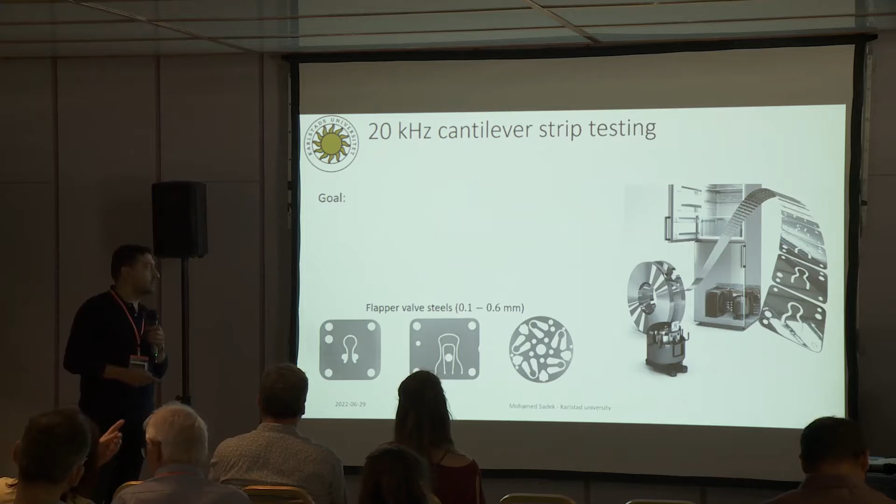The ones that we are testing in our lab have thicknesses in the range between 0.1 and 0.6 millimeters, although the presentation today will only include one thickness, the one that we started with. So the goal of this work is to develop a fatigue test method for thin, high-strength strip steels at 20 kHz for very high cycle fatigue in the gigacycle regime. And to do that, it's best to use the ultrasonic fatigue testing system. Then we can reach these lifetimes within reasonable times.

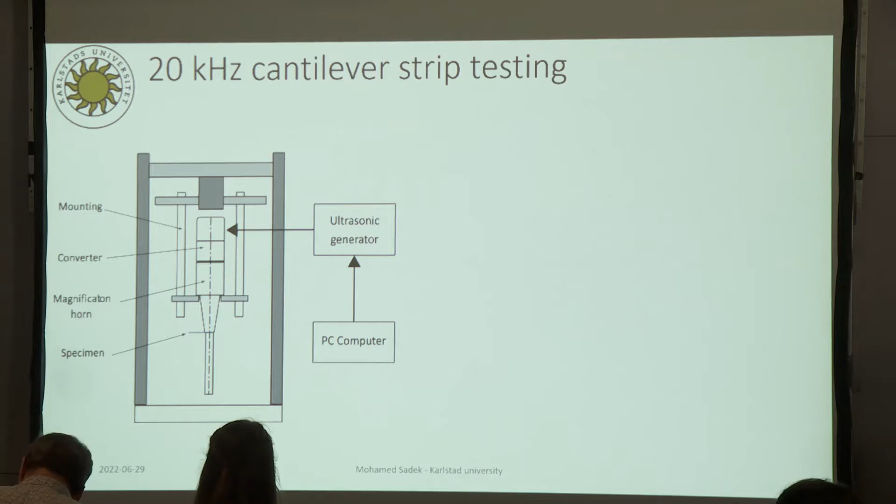So the idea was first seen on a brochure by Shimadzu, the company, where they showed a similar setup. They have the 20 kHz horn, and they clamped a strip steel specimen just below the horn right here. We took this idea further and developed it, and we designed our own specimen. We included a waist into the specimen, inspired by previous testing on strip steels at lower frequencies. The thickness of the material is 0.381 millimeters, and that is the thickness that will be included in this presentation.

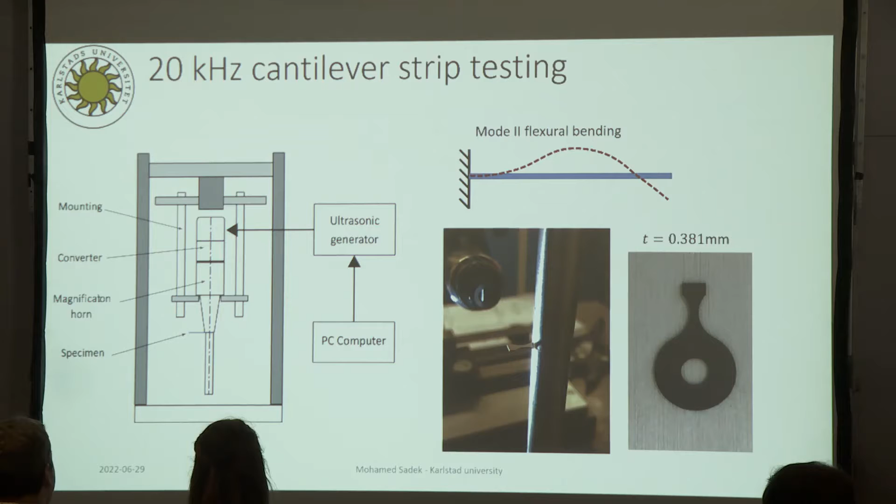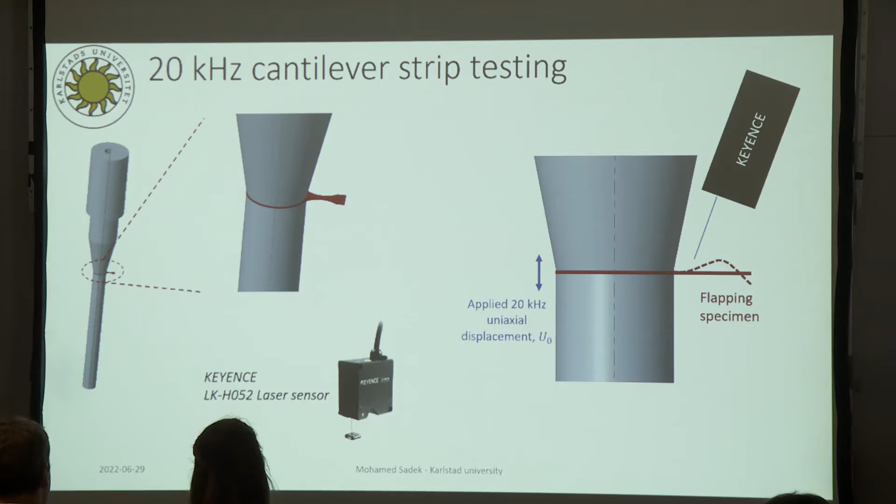We have the applied displacement in the horn right here, and that will be called U0 throughout this presentation, which is what we control during the experiment. We control the displacement right here. And then we will have a flapping specimen. We have also measured the displacement along this specimen with a laser sensor to try to confirm the calculations and the predictions.

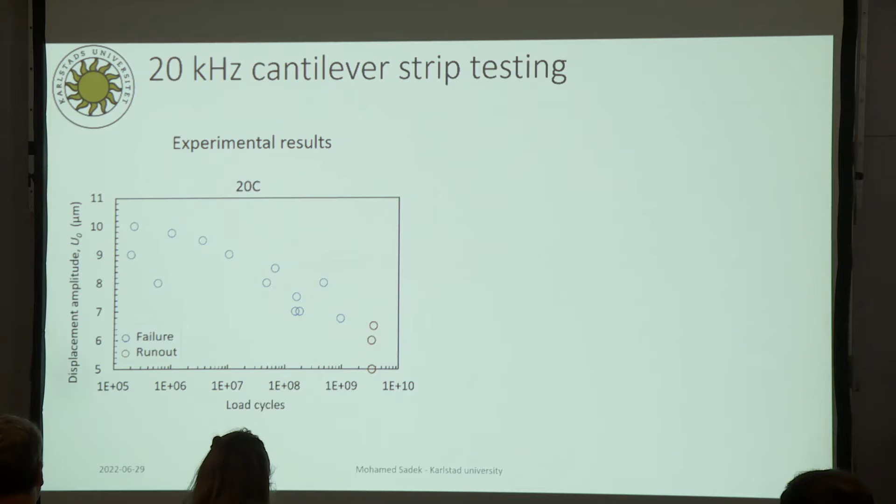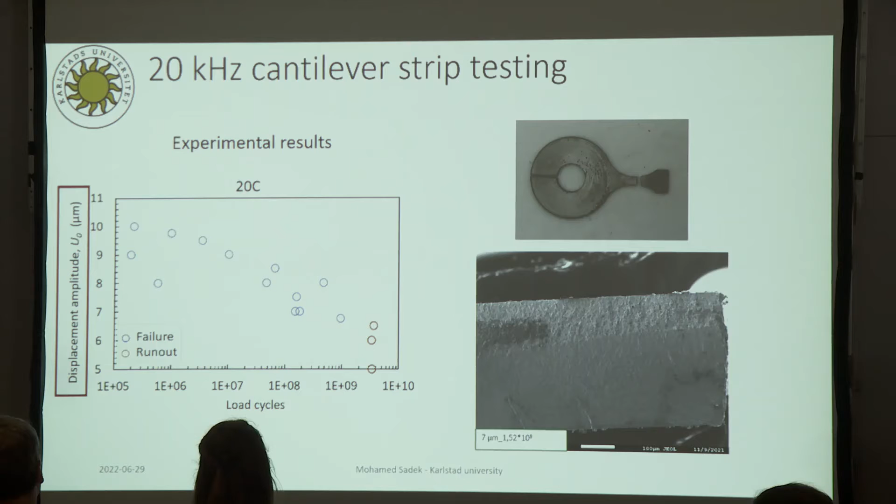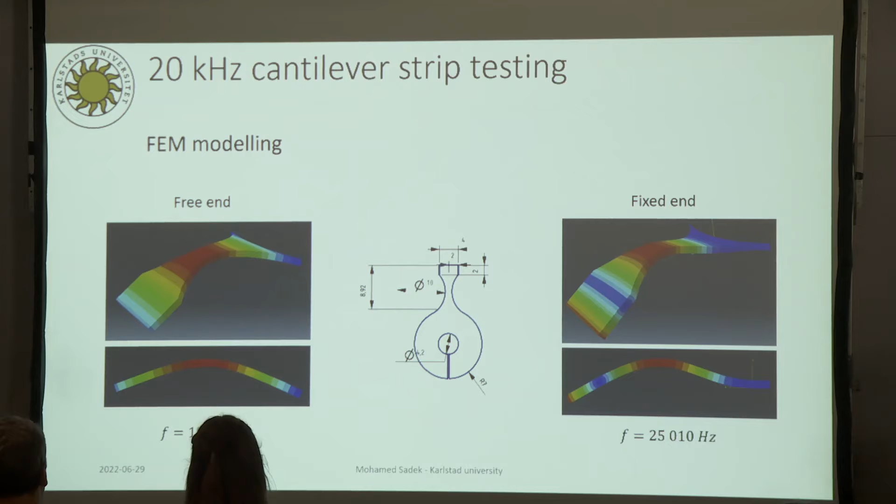For those of you used to the ultrasonic fatigue testing system, you should know that every part of the system has to have an individual resonance frequency at 20 kHz, but this specimen does not, and it works anyway. That is explained by the fact that the specimen has so little mass compared to the rest of the system that its frequency does not affect the frequency of the whole system. The specimen is so small that it's forced to follow the system, even though it's outside of its own resonance. So that was lucky but good.

Then we did the steady state analysis to try to calculate the stresses in this specimen. We applied a displacement of 5 micrometers where the horn should be, and we fixed the displacement in the transverse direction to correlate to the real life experiments.

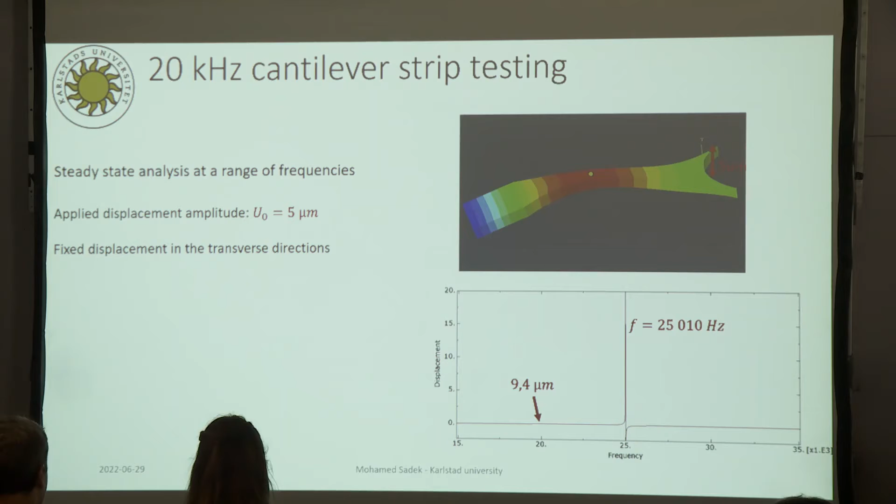So at 20 kHz, we should expect 9.4, approximately double the U0. If you look at the stresses, we should expect something close to 70 megapascal at 20 kHz in the same point. And at 20 kHz, this is the shape of the specimen according to the FEM model. It's back and forth, so this end is where the horn is clamped, and you see there's zero angle going out from the horn, as it should be.

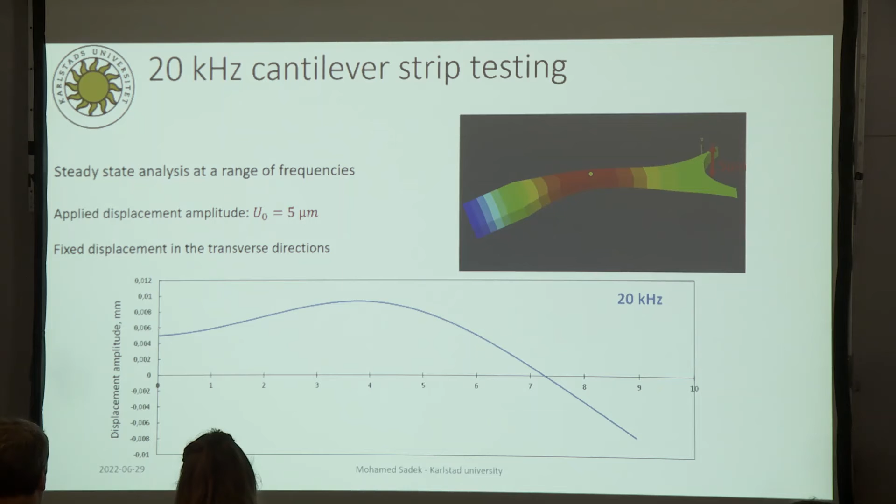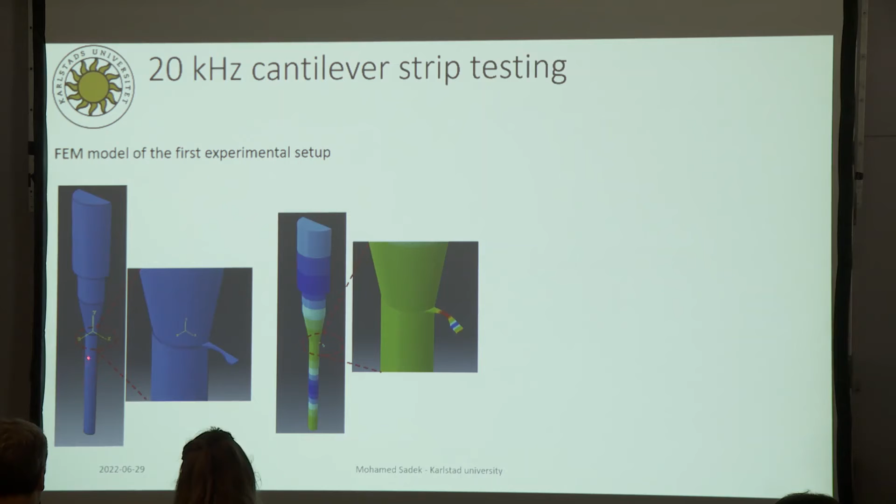Then we modeled the whole setup with the horn and the rod below the specimen to see the effects of that. We did a modal analysis, and we found out that the frequency is well within the ranges, but again, as I mentioned earlier, the system here will be at resonance, but not the specimen. The specimen will be forced to follow the system.

We do not know exactly why this discrepancy exists. We have some ideas. It's still under investigation. We have a couple of ideas on where to look. We think that other modes might come in and superimpose the amplitude and increase it in that way. We're not sure which mode. There are several candidates, several modes that are close to 20 kHz. That could be a reason for that. We will continue to investigate it. But as of right now, we do not know the reason for this difference.

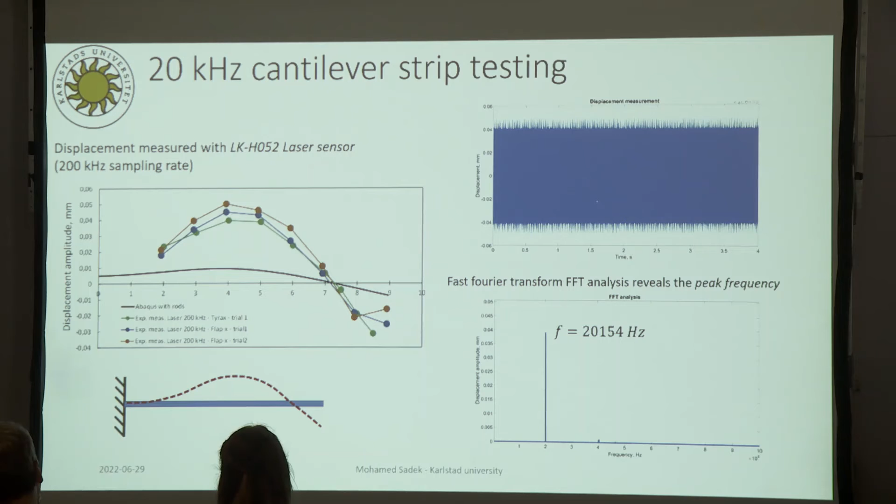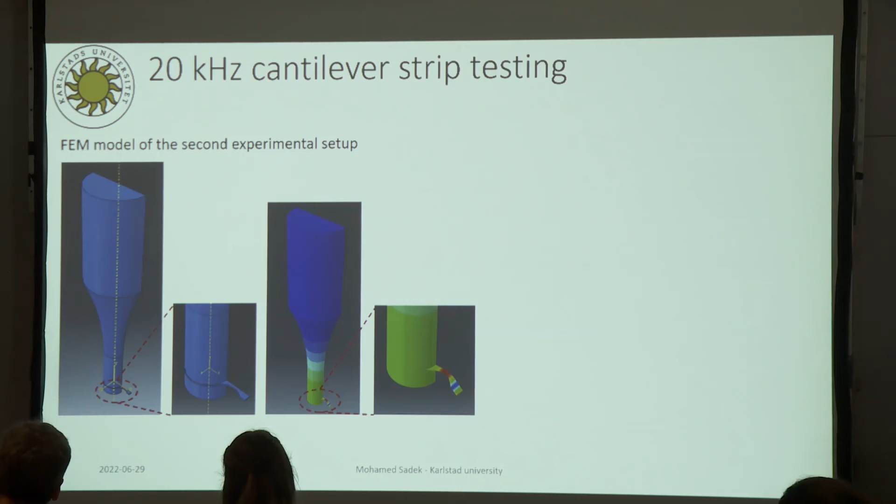Anyway, at that time, we also came up with a new idea about a new test setup where we got rid of the rod in the bottom. And what we did is we tucked the specimen into the horn instead. So we have one wavelength here with this small specimen tucked in here. And because it's so small, it's okay. It works. And it's a much better system. It includes less parts, less problems, and it should be smoother to use. Modal analysis shows a correct frequency, the same as before. The horn is at resonance, the specimen is not, it follows.

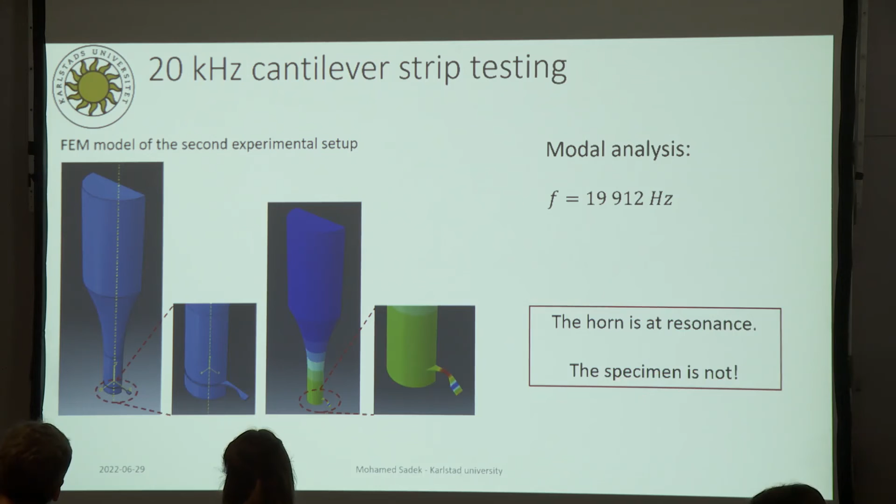And with this new setup, all of a sudden we get a very good agreement with the FEM model. So we do not get the discrepancies that we saw earlier from the first setup. That means that these modes that we think are coming in are not coming in when using the new horn. When using the new horn, the displacement amplitude is according to the FEM model.

Anyhow, we did a lot of testing using the old setup, and we have a lot of results. So we would like to somehow estimate the stresses to be able to use these results. This is what we did. We made an estimation of the stresses in the specimen in the first setup. And also we will retest the same materials using the new setup where we know the stresses now. After that, we will be able to compare the new and old S-N curves to see how reasonable the values are. Anyhow, the estimate of the stresses, how that was done, if I just go back maybe.

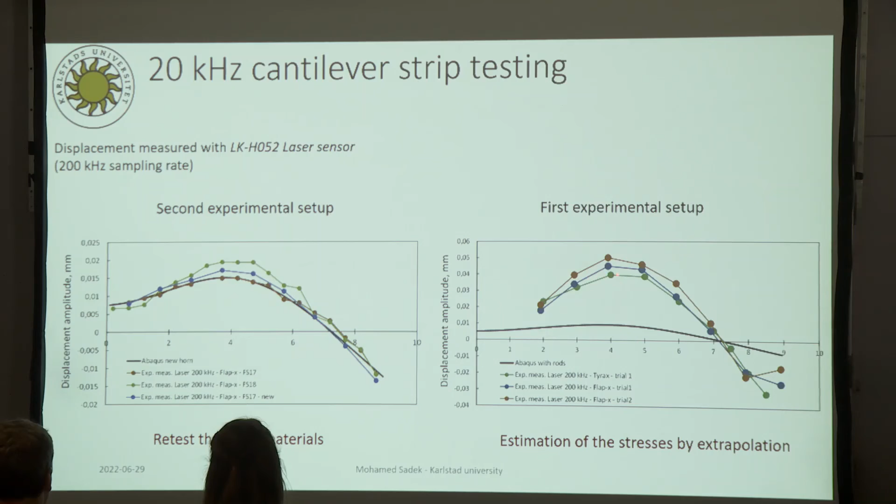From the laser measurement, we could see that the relationship between U0, which is the displacement at the horn, and the displacement in the middle of the specimen is approximately 1 to 8. For every 1 micrometer at the beginning, we will get approximately 8 micrometer displacement in the middle of the specimen. So that is the first rule that we will use for the estimation. 1 micrometer in U0 will correspond to 8 micrometer displacement in the middle.

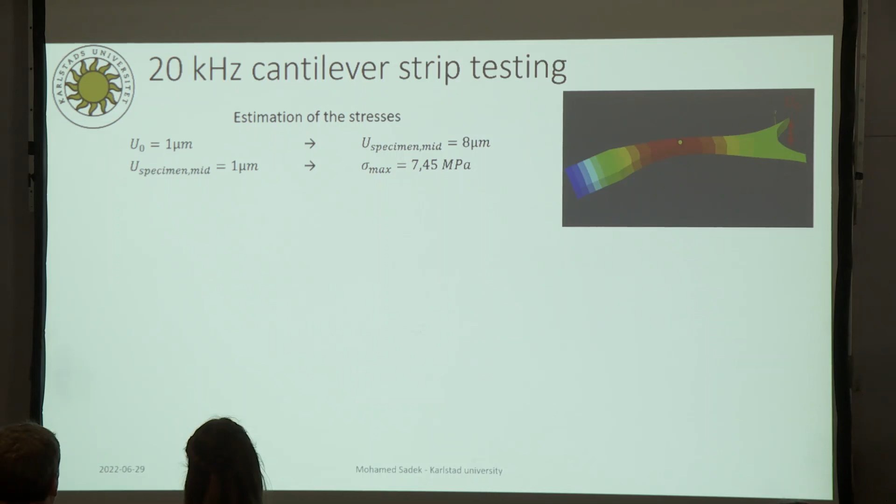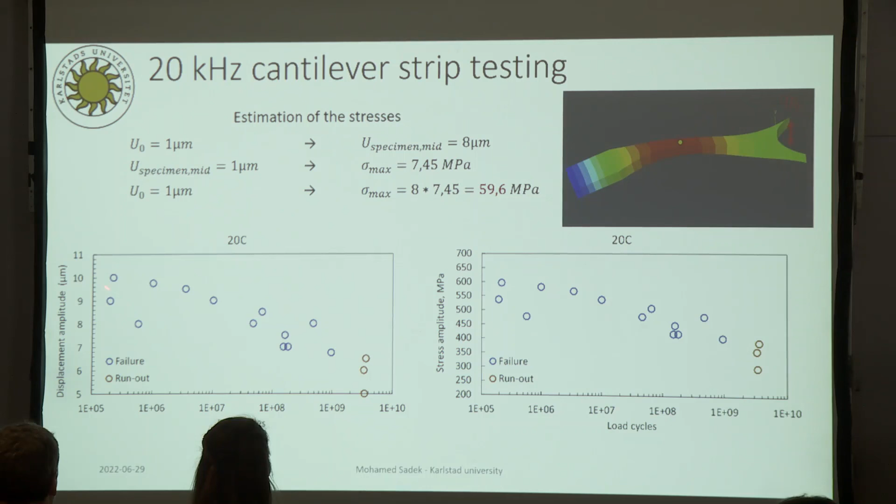And from Abaqus simulation, we could see that 1 micrometer of displacement in the middle corresponds to 7.45 megapascal stress in the same region. And then finally, we can finalize our very simple assumption, that 1 micrometer in U0 will correspond to 59.6 megapascal in the middle of the specimen. And we can use that number to replace the displacement on the y-axis with stresses. And doing a fast comparison to old data from the same material at lower frequencies, we can see that these values are actually reasonable.

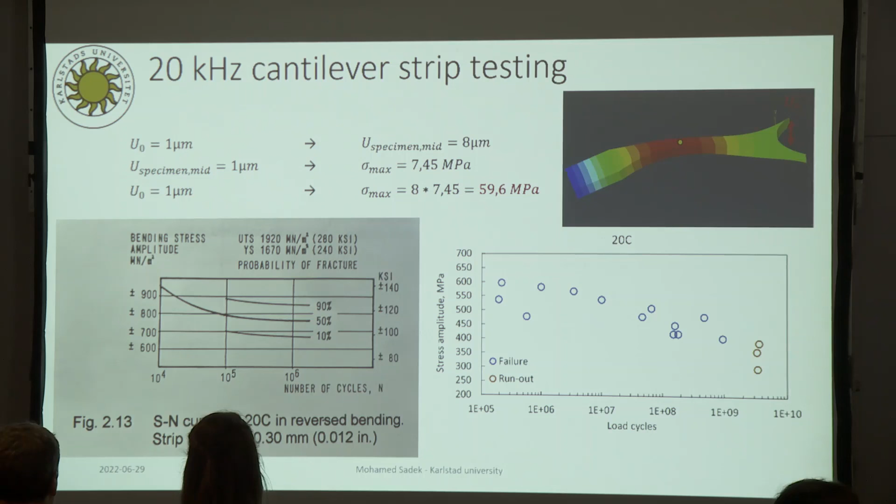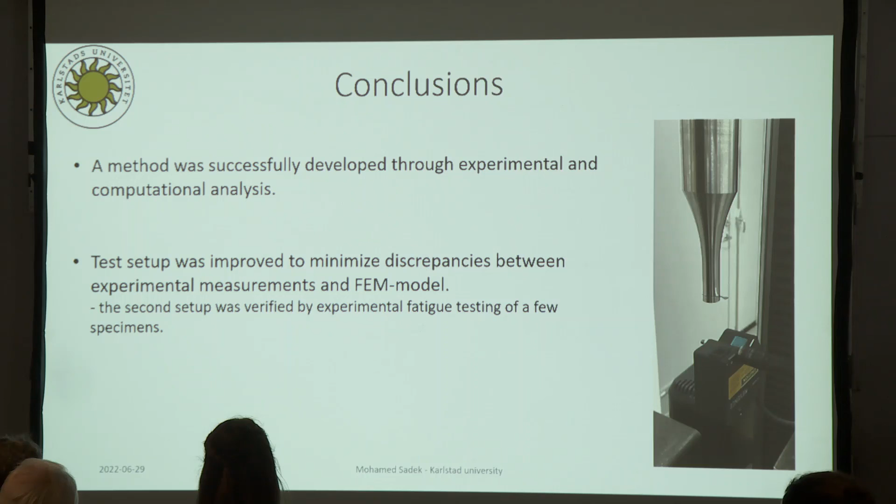Anyhow, as I said, we will retest the material with the new specimen. We will be able to compare it to these old values. So a method was successfully developed for testing strip steels, and it was successfully improved to get rid of discrepancies. And the new horn was actually tested with a few specimens, and the specimens were successfully failed in fatigue failure. Thank you for your attention.